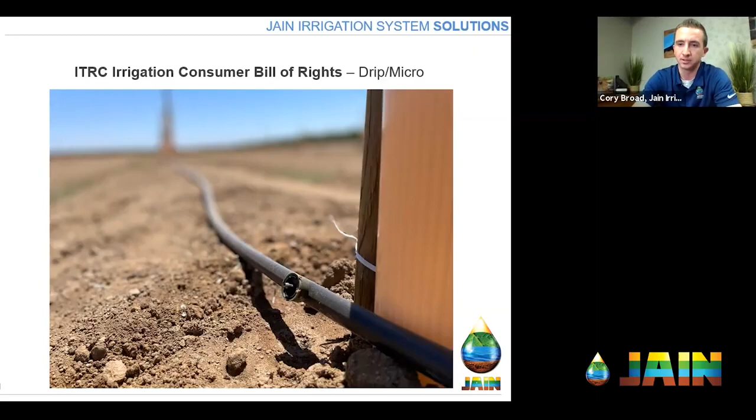And as you mentioned, we've looked at some of this before, and this is kind of the second part of our three-part series on the Irrigation Consumer Bill of Rights. And so without further ado, we'll jump into it and specifically look at the drip and micro irrigation Bill of Rights. I guess I can kind of move through this part fairly quickly as you kind of introduced all that. So I appreciate that. This is from our last presentation as well, but just kind of a roadmap of where we're going.

The ITRC, which is the Irrigation Training and Research Center at Cal Poly, created the Irrigation Bill of Rights to do exactly what you had mentioned, Richard, is help consumers, and not just consumers from a standpoint of getting a product and making sure that it works, but a lot of these, especially on the agricultural side, this is a business. And so we have to make sure that we're getting value and maximizing the value out of that. And so over the years, the ITRC has done a great job of taking the Bill of Rights and updating it, and then also expanding it.

And then now we have 3 documents. And so as I mentioned before, we went through the general, we're going to go through the drip micro specialty document today. And then hopefully here in a couple of weeks, may have a special guest come in and do one with me as well, and do the soil and plant moisture monitoring systems as well. So again, very specialized into what are you purchasing. So it's not just, again, a blanket document. They've really drilled down on some of the details.

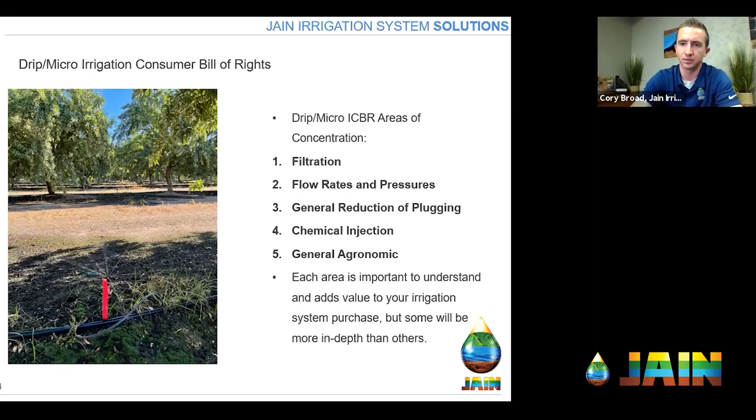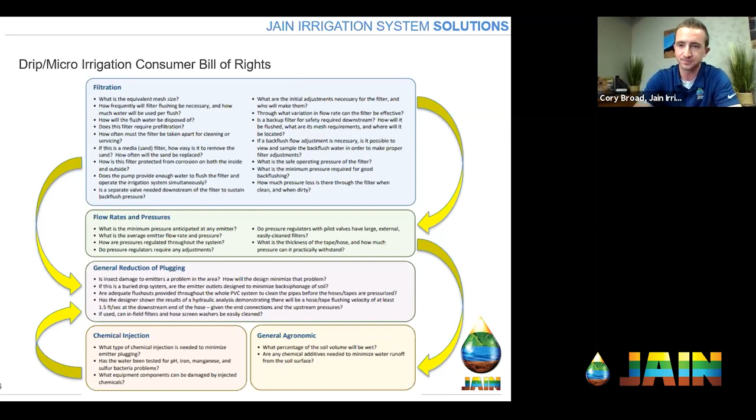And then maybe you're also seeing some issues with plugging. Well, now you have to do chemical injection in order to get rid of that. So there's just so many things that are intertwined. So when I say that they're all really important, I really believe that, even though general agronomics technically only has 2 bullet points and filtration might have 20, they're all intertwined. This whole thing is an irrigation system, and it's really important to understand that systems all work together. Yeah, that's a really good point. Each one relying on the other, so you can't have one more important than the other. Absolutely. Links in a chain.

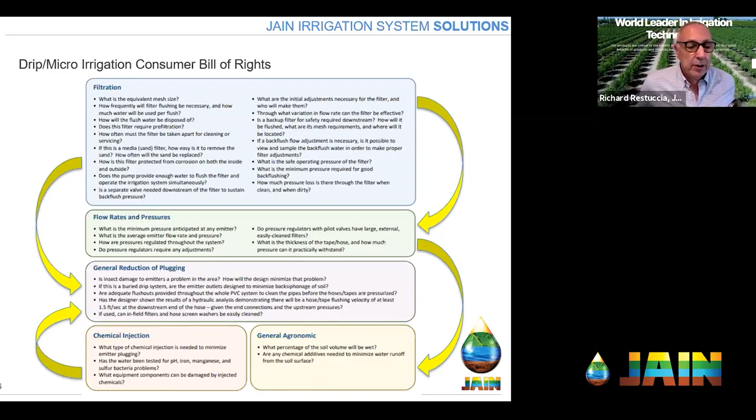So jumping into filtration, I took some of the bullet points. We won't go through every single one, but we'll go through quite a few. One of the first things that comes up is, what is the equivalent mesh size of your filtration unit? If you're using a screen filter like our Steel Spin Clean, this information is readily available and pretty easy to understand when ordering the product, either as the consumer or the irrigation dealer. We have screens at 30, 50, 100, 150, 200 mesh. We do custom meshes as well. It's even stamped on the side of the filter, so it's easy to identify.

When you get into sand media, it's a little bit different because you have the tank itself, but then you have the media that does the actual filtration inside. So what type of media is it, and what effective mesh size is that? I did some of the basic setups that we do here in the Valley with the different crushed silicas, and roughly what those numbers translate to. Sometimes on a bid, you might see as a consumer number 16 sand or silica. Now you know that's 200 to 150 mesh, depending on the quality. It gives you a baseline. If you're buying drip tape, you might need 200 mesh.

So that might be something you can look at and say, hey, wait a sec, why don't I have number 20 silica in here to provide that extra layer of protection? And so with the media stuff, you just need to be aware of some of those small nuances, because you can change the filtration capacity of it just based on what you're putting inside of it.

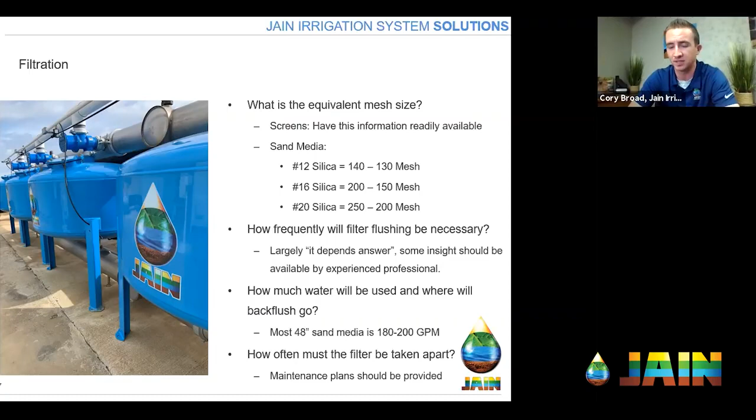So again, if you don't know, or you're not educated, or these conversations today aren't happening, you just won't know. And so it's just an opportunity again, why we're here today, to be able to educate people on saying, hey, let's ask these questions. Let's talk this out now, because it's a 20 to 25 year investment. Yeah. Okay. Well, that's a good guide.

Thank you. So one of the things that gets overlooked a lot too is, does the pump provide enough water to flush the filter and operate the irrigation system at the same time? And so again, we talked about that 200 gallon a minute, just say, maybe even down to 180. But if you have an 800 gallon a minute irrigation system running, and then the filters go into backflush, you've now added 25% demand to that system.

And so if the pump is not set up to handle that, you're going to see low flow in the field, and you're going to see a pressure drop, because that water is now going out through one of those tanks during the backflush cycle. And it's going to happen to the next tank and the next tank until that flush cycle is complete.

And if you have excessive flushing, you can actually be really disrupting your distribution uniformity as well. And then your application efficiency of your irrigation, because you're putting 25% of the water for a certain period of time, not even on your field. And so it's really important to manage and understand that, and then also make sure your pump can handle it.

And then another way that kind of bleeds into this a little bit is pressure sustaining valves. So there's a separate valve needed downstream of the filters to sustain backflush pressure. Now that doesn't necessarily stop the issues in the field from maybe a lack of water standpoint, because a sustaining valve, what it will do is it will close down and limit some of the water going out to the field to ensure that there's enough pressure and flow going through those tanks during backflush.

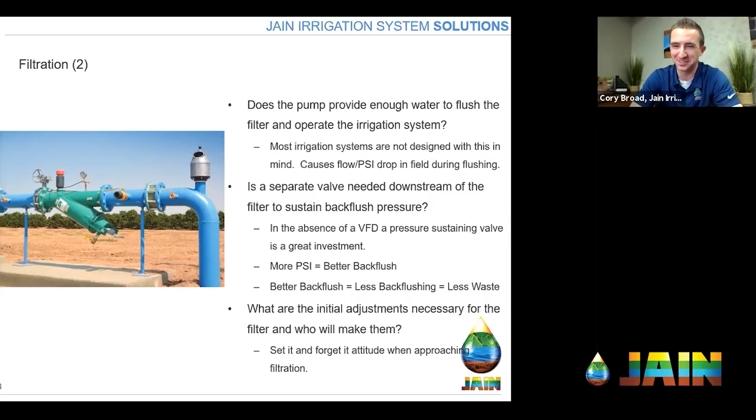Absolutely. I'm glad I did it. I've done a few maintenance presentations as well. So if anybody needs maintenance tips, please look those up.

Yeah. So going into the next section, flow rates and pressures, I think it's a fair question to say, what is the minimum pressure anticipated at any given emitter? To put it into context, most pressure compensating drip emitters require about 10 PSI to operate. Many work below that as well. Our top drip and amnon emitters both operate below 10 PSI. So I think it's really fair to say, hey, what's the minimum amount that I need? But also, given this area or constraint, what pressure should I be seeing in this area?

Because then if you're performing that maintenance, it gives you an idea or a checklist to be able to say, oh, wow, I am being effective at that. I'm maintaining what the system requires or what we would expect. And then to couple with that, what is the average emitter flow rate and pressure? And that's going to be really helpful in your non-pressure compensating applications. And it also really is the foundation for some of your baseline and irrigation scheduling.

For instance, if you have a micro sprinkler system, an orange jet at 20 PSI is 8.4 gallons per hour. Well, just say you have maybe a little bit of an excessive hose loss, and by the end of that line, you have 15 pounds. Well, now your flow rate's 7.3. Well, what's the average emitter flow rate in there? And then also that's going to impact your uniformity. So again, it's just a spot check to be able to say, hey, what should I be getting and what should I be looking for? Because then that might trigger you to say, wow, I need to do more maintenance because I'm seeing this change.

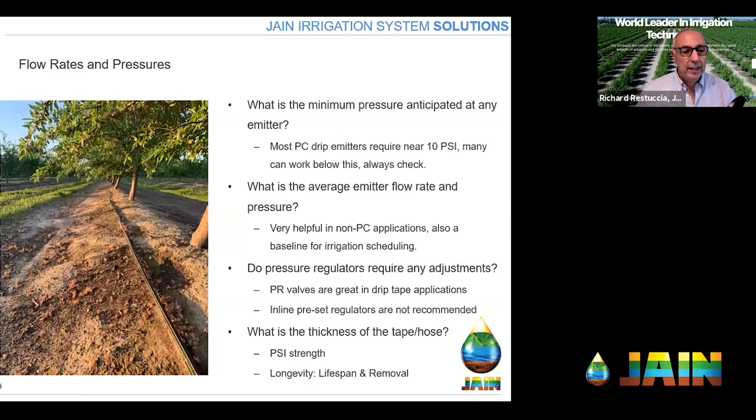So going into general reduction of plugging, if it's a buried drip system, are the emitter outlets designed to minimize back siphonage? For us, on our top drip and Amnon products, we have AS technology, which is anti-siphon, which means it won't pull water and debris back into the outlet of the emitter. It is available on the market today. It's something that people should look into, especially as they start looking at more opportunities for subsurface drip irrigation in almonds.

And then you can see a picture on the left-hand side. That's me flushing a field, maintenance. And one of the things that's important is, are there adequate flush outs throughout the entire PVC part of your irrigation system to clean the pipes before you even put water in your hoses and or your drip tape? And the way I really look at this is, with enough flush outs, easy to do is going to create a better overall maintenance program.

You mentioned it earlier, Richard, you don't like doing it, but if I make it easier for you, or if you're a grower and you have your employees, the easier it is to do, the more likely everybody is going to be to follow along and get that done. And then something I also see that happens quite a bit is, are the flush outs big enough? Jetting of water, which is essentially turning your hose on all the way, and then when you put your finger over the end of it and it sprays out, you basically push the water farther, but you're limiting the flow rate of the water that's coming out.

The same concept happens when you have, say, a 6-inch pipe with a 1-inch ball valve flush out. You're just kind of jetting the water and you're not getting all of the water flow through it, which is what's carrying the debris that you're flushing out anyways. So you go through and you do the process, and then you're still not as effective as you wanted to be. And so maybe you end up having to do it more often, or you're just not effective at all, and then it leads to other plugging and other issues.

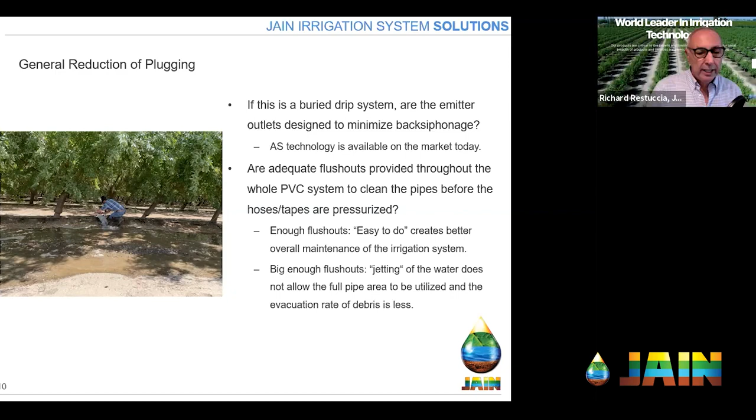Yes, sir. Staying with that same theme, has the designer shown the results of a hydraulic analysis demonstrating there will be a hose or tape flushing velocity of at least 1.5 feet per second? That's a lot, I understand. Really, it's about being able to understand, at the end of a hose or a piece of drip tape, so in this case a lateral, is there going to be the ability to get 1.5 feet per second velocity of that water when you open up the end of it?

1.5 feet per second is the minimum that we like to see when flushing an irrigation system to remove most debris. In other cases, even 2 feet per second may be required, depending on the weight of your material and how much of it is in the irrigation lateral itself. Many irrigation systems I see don't take this into consideration, especially with drip tape, because the size of it around here is 7/8 inch inside diameter, and we're going a 1/4 mile run. So it's roughly 1,320 feet.

It's a long ways with a decent sized pipe, essentially. You need a lot of velocity and pressure to get through there. And so, for example, if you use an 18mm hose, 1/2 gallon, 36 inch on an 1/8 mile, which is a very standard run, you're going to need 32 PSI at the riser in order to achieve 1.5 feet per second at the end.

And so making sure that the system is zoned appropriately to make that easy, but also is capable of handling it. People size the system for irrigation operation, not for irrigation maintenance and flushing. And so there's a unique characteristic difference. And we'll get into that a little bit more later on.

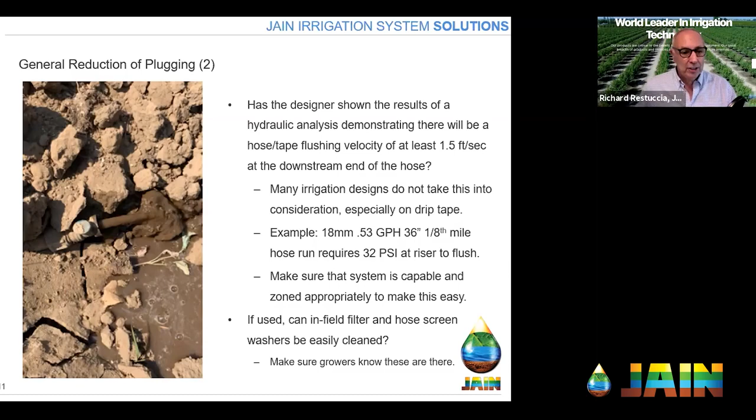They're not flushing in a maintenance-specific operation. And so they weren't getting that extra pressure. Thus, they weren't getting that velocity at the end of the line. Therefore, this is just contaminants that are just sitting at the end of the line coming out. You're not really pulling any of the material out. So yes, it is for shock, but I do see it far too often. Yeah, well, it makes a great point. It almost looks like chocolate milk coming out of the line. Absolutely.

So going a little bit more in depth, as I mentioned earlier, on some of these things. So if you had to do a 2 feet per second velocity on that hose that we were talking about earlier, it's going to take roughly almost 2 gallons a minute to flush an 18 millimeter hose at that velocity. And so if you have a 40-acre field, and I picked a standard almond configuration here, that field's going to require 560 gallons a minute to operate during irrigation operation.

Remember, I told you maintenance operation is different. Well, the emission devices are taking water, and the irrigation system needs a certain amount in order to flush. So the emission devices are taking 2.3 gallons per minute per lateral. Then we added almost 2 gallons a minute for the flushing aspect of it. The demand is now 4.3 gallons per minute per lateral flush.

And I just kind of picked an obligatory pump curve here I found on the internet. But if we were operating out here in the blue circle area, now, in order to maintain that pressure that we were talking about earlier, we'd be operating back here in the red area during the flush event. Well, that means that we can only run about 350 gallons a minute max in order to maintain that pressure.

With that flow rate requirement and what the pump can do for us, we can only open up 82 lateral ends. And again, this is without other friction and other factors involved. It'll actually be a little bit lower than this. But the field, to put it back to shock value, has 240 lateral ends. That's a lot of opening and closing small sections, because the system may not be laid out appropriately for it.

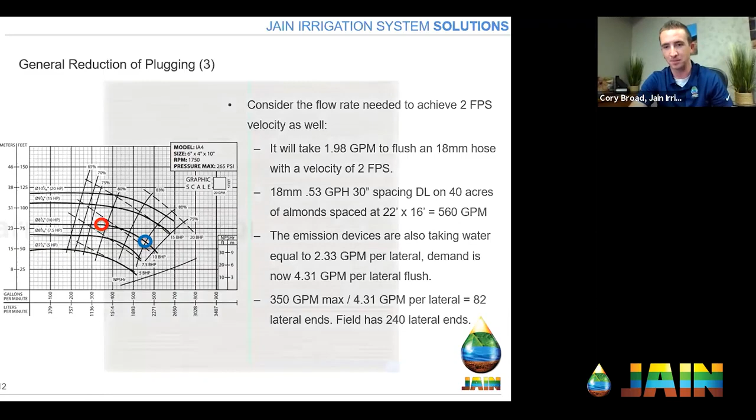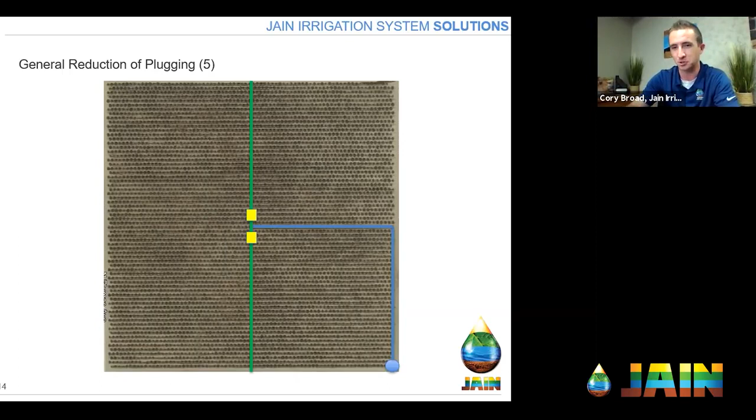So again, just a real life example of a simple investment up front and a simple conversation with the end user. Make it easy to do and they'll do it, but also explain, here's the value proposition. Your cost of labor versus the cost of this extra pipe and maybe 2 valves. Here's what you're going to get for the next 25 years.

Yeah, thank you for showing us that solution, Cory, because I was just imagining myself running around this field, opening some valves, closing a bunch more in 100-degree heat. I'm probably going to skip it today, right? I'll catch it when it's cooler in a few weeks, but providing this solution makes it a lot easier and much more likely to stay on my maintenance schedule then.

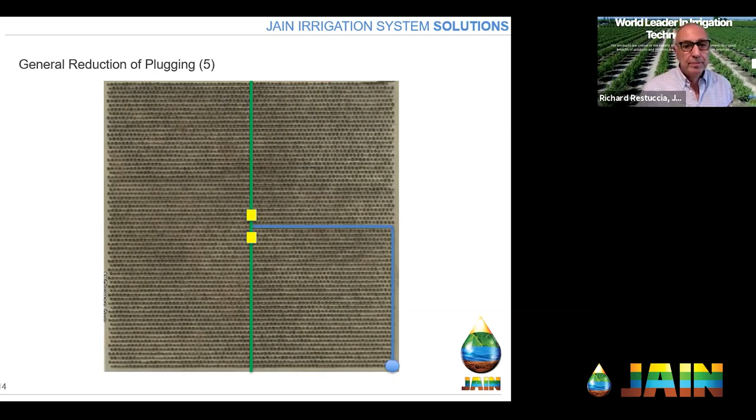Absolutely. So getting into chemical injection is going to be needed in some cases to minimize emitter plugging. I think understanding that and bringing that up front to growers is important. I kind of look at it in 2 different ways. Constant injection, which is generally going to be used for like pH control, getting bicarbonates out of the water, lowering the pH, so on and so forth. And then obviously there's a maintenance style, which is kind of that slug in the material and then let it flush. Obviously, we want to see the fertilizer applications and more of the constant injection side of things.

But there needs to be an understanding, can the injection system handle something where maybe we do have some plugging that's gone on in the field and we need to put in a decent amount of material in a short period of time and then be able to flush that out appropriately? So just understanding and making that clear to the consumer, I think is important.

And then has the water been tested for its pH, iron, manganese, sulfur bacteria? These things all exist across the US in a number of different scenarios. Certain places have different water quality issues. I think many companies can do that for you outside of just your irrigation dealer. But I do think dealers should offer to take water samples, hopefully partner or have a relationship with a local lab if they don't have something internal that they can offer as well. And so I think just a heads up on that is really important.

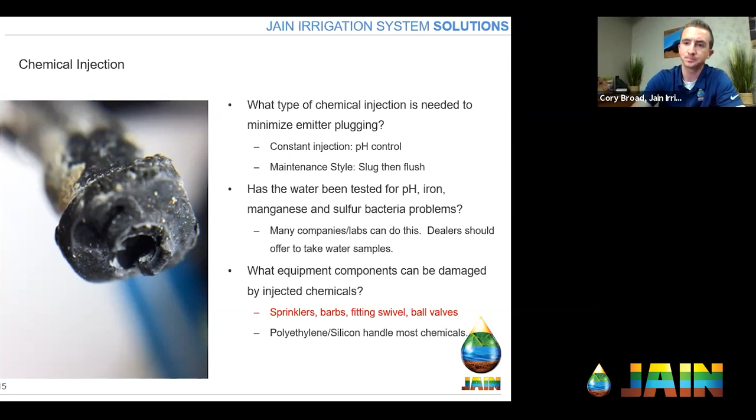Yes, sir. So getting into the last piece of today, the general agronomic, there's really only 2 things on the ICBR about this, but one that's really important overall is what percentage of the soil volume will be wetted. That's going to influence your soil water holding capacity. It's going to be obviously really important for irrigation scheduling, because you're talking about how much water per foot of soil. Well, you're depending on the per foot of soil, but also the depth and the width of that, right? That's going to give you the volume.

And then are there any chemical additives needed to minimize runoff? One of the things that comes up a lot in agriculture and has been used in the past, on the coast especially, is polyacrylamide, PAM. It gets used in the construction business as well, historically, to basically limit runoff contaminants into sewers and things like that. And basically, it just flocculates liquids in soils and reduces that runoff and pull of soil.

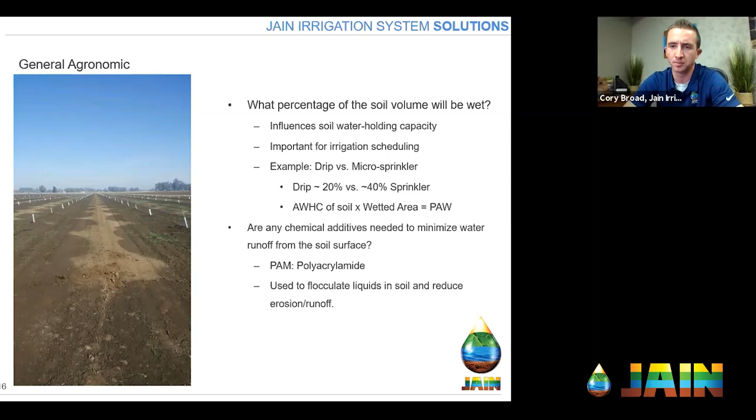So in summary, again, all the points are really valuable. I hit almost all of them. And I know we've gone through a lot today. But again, this is meant to create good discourse between the consumer and the dealer and make sure that everybody understands what the expectations are and how we're going to meet them.

So if I had to go through and just do a summary for you and give you a takeaway, starting with filtration, does it meet the product need? I talked about drip tape earlier. Some drip tape needs 200 mesh. Other thin wall emitter line needs 120. Most double line drip is 120 to 150 mesh. Most sprinklers are 100 mesh. So understanding what the product application is, we need to make sure that the filtration is meeting that.

But also, does it meet your operational needs? If it's something that you have to go through and flush manually all the time, maybe that's not for Richard. Maybe it's something with an automatic type system that's designed well and is a little bit less maintenance intensive. So just kind of understand what the operational needs are there.

Pressure, how is it managed in the system? Are there a lot of valves? Are the valves something that take care of themselves for the most part? Is it something that you need to go out and manually adjust a gate valve to continue to operate? And then also, what's the minimum needed for the product or the application that you're running? Because again, that's a baseline.

If Richard goes out and he says, oh, I don't have the minimum that I need to operate this emission device, now something's wrong, then maybe it's maintenance. Maybe it's something bigger than that. But you have to understand what that is. And I get asked that question a lot.

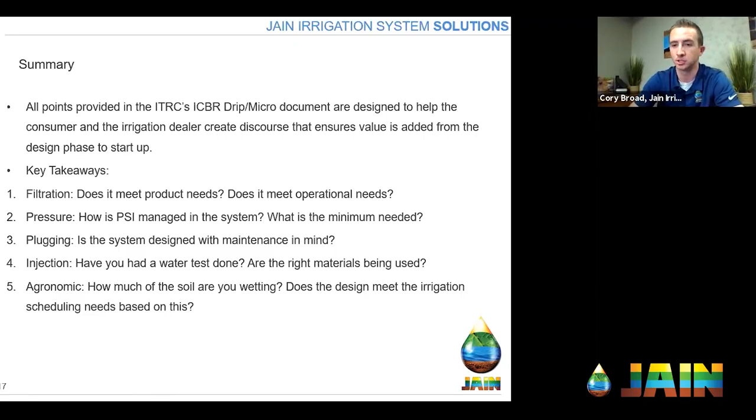Again, it's great discourse, and it's meant to be a two-way street. It's not meant to be something that consumers can grill the dealers on. It's meant so that the dealers, to your point, can say, hey, this is why we do what we do, and this is why I'm charging you what I'm charging you to deliver the most value. Yeah, no, that's great, Cory.